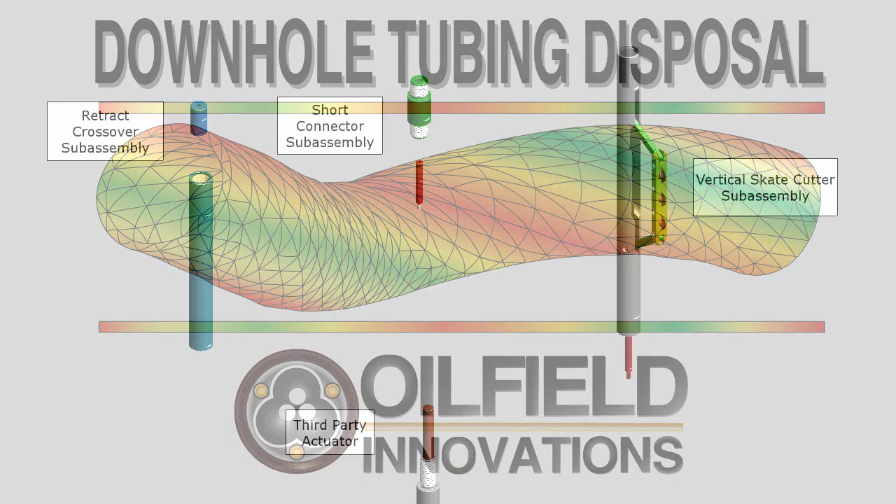Greetings, this is Oilfield Innovations, and this video explains the retraction and extension of our vertical skate cutter using a third-party actuator, a crossover, and a short connector. Explanation of the skate cutter can be found in other presentations. This presentation focuses on the two parts of the short connector and the retract crossover subassemblies.

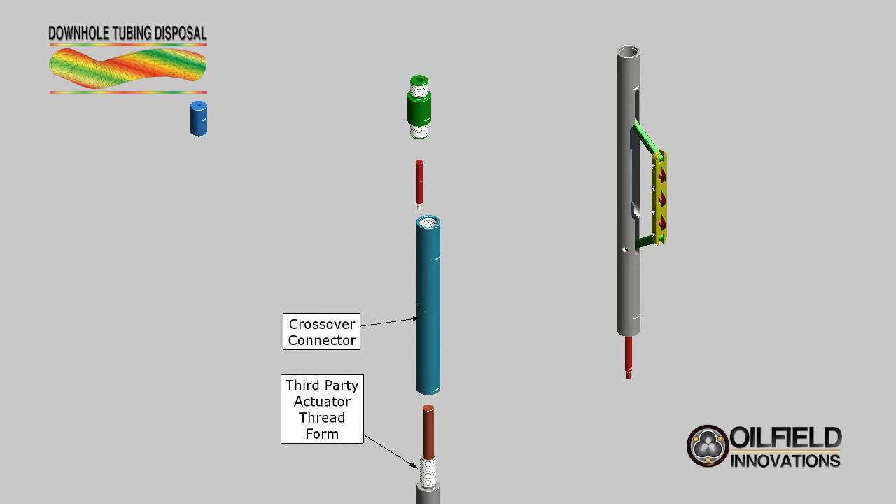The crossover connector is screwed onto the thread form of the third-party actuator. The retract crossover connects the third-party actuator with the vertical skate cutter assembly and considers the distance traveled by the actuator's plunger. The short connector actuation shaft is then screwed to the actuation shaft of the skate cutter.

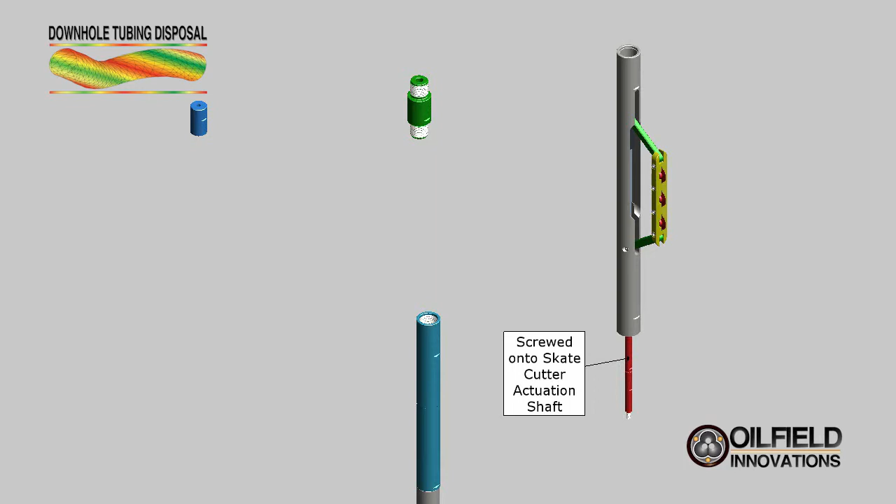The short connector body is then slid over the actuation shafts and screwed onto the skate cutter housing. The short connector can be used to connect various subassemblies. For example, it can also connect two skates.

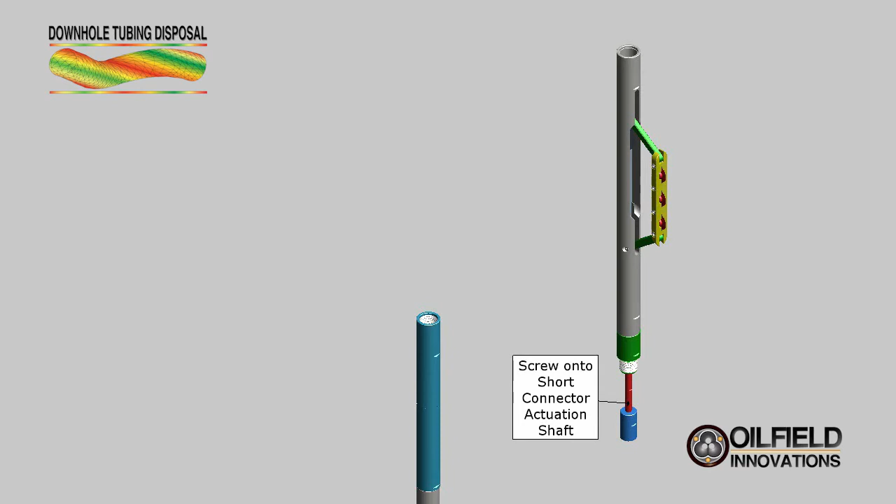Once the short connector is tightened, the retract plunger can be screwed onto the short connector actuation shaft. The plunger is used both during retraction and extension. The subassembly can now be slid in and screwed onto the retract crossover body.

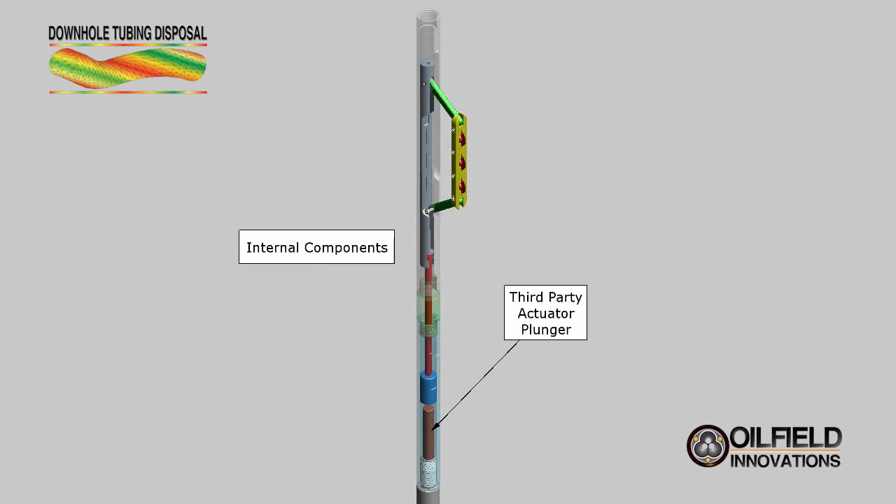The retract crossover anchors the vertical skate cutter assembly to the third-party actuator and positions the internal components of the skate cutter relative to the movement of the third-party actuator's plunger. The plunger of the third-party actuator will initially close the gap between it and the skate retraction plunger, and then push the vertical cutter's internal components to retract the cutter skate into the skate housing.

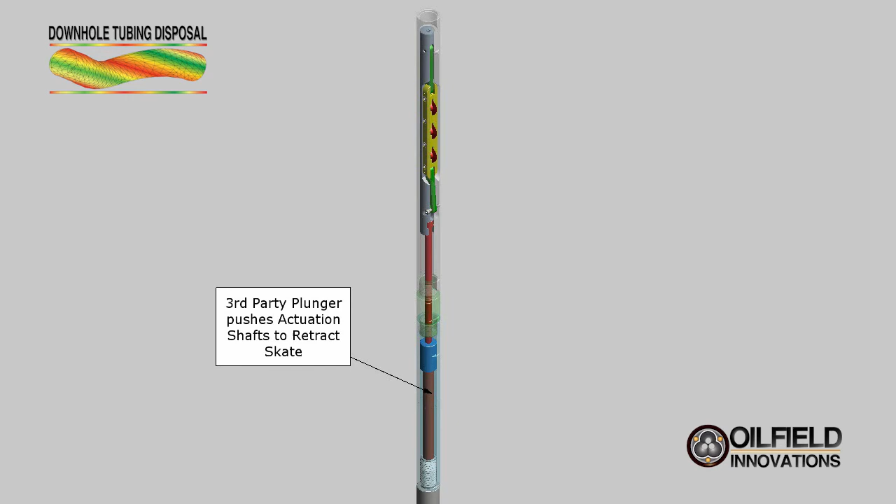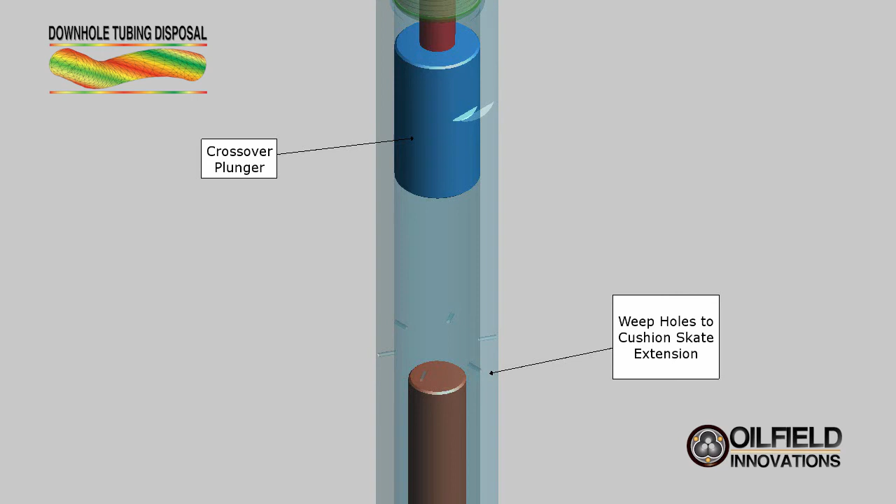The upper skate arm is pinned to the internal skate piston, while the lower skate arm is pinned to the skate housing. Downward movement of the skate piston pushes the skate outwards against the lower arm connection with the skate housing. During extension, fluid expelled from the weep holes of the retraction crossover cushions the extension to prevent impacting the cutters abruptly against the tubular to be cut.

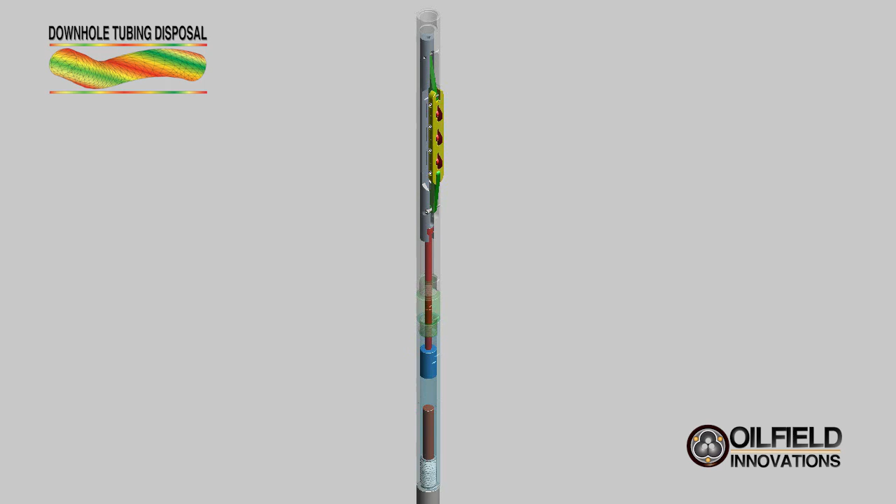Actuation pistons within each vertical skate cutter subassembly are connected so as to act as a single shaft during both extension and retraction of the skates. Also, the screwed connections of the external housings and the internal shafts form a rugged tool resistant to damage and back off. That completes our video.